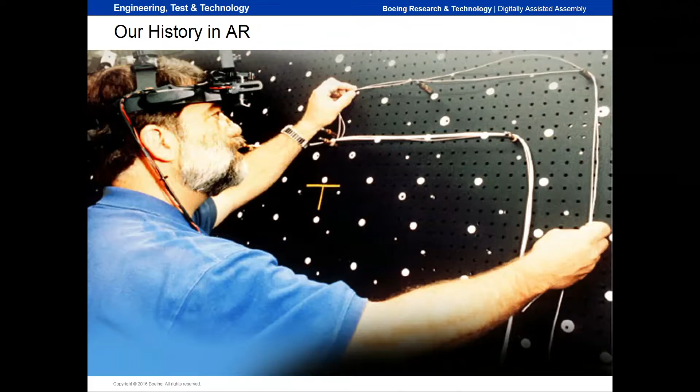We actually have a long history in AR. I've given a few talks at AWE before at other conferences, and I always like to show this picture. It goes back to the late 1980s. These are two of our researchers, Tom Caudell and Dave Mizell, up in the Puget Sound area, in Everett, at the commercial airplane factory. This is one of their prototypes. He's wearing an early version headset, seeing very basic 2D line instructions on how to build up a wire harness. So we've been doing this kind of work for a long time. Obviously the technology was not ready—this was way before its time.

But we've been thinking about these things for quite a long time. Now, of course, technology is far more mature and much more available, so we're doing a continuation of what was started over 30 years ago.

I always like to start with a few definitions, especially since in the Boeing community we're trying to standardize or come to some agreement about what different devices make sense for different applications, different workflows, and what we call different types of technologies. So the technical community at Boeing has honed in on these four kind of baseline standardized terms. I know this doesn't agree maybe 100% with everybody, but at least it's what we're trying to come to a conclusion on.

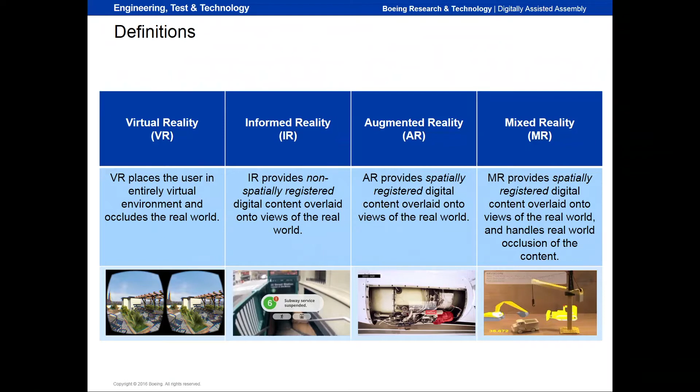Everyone's familiar with virtual reality, where everything is virtually generated. We call informed reality things like Google Glass or a Vuzix display that is kind of often in your peripheral vision, probably not spatially registered, but is taking some content and showing it to you on a wearable. Augmented reality, everyone is familiar with what that means, and we call mixed reality basically augmented reality that handles occlusions in real time, so real objects can occlude virtual objects. Now, the BARK tool that we're standardizing really only deals with augmented and mixed reality. We have lots of other work going on around the company using other types of displays, informed reality and virtual reality, but the BARK tool only deals with AR and MR.

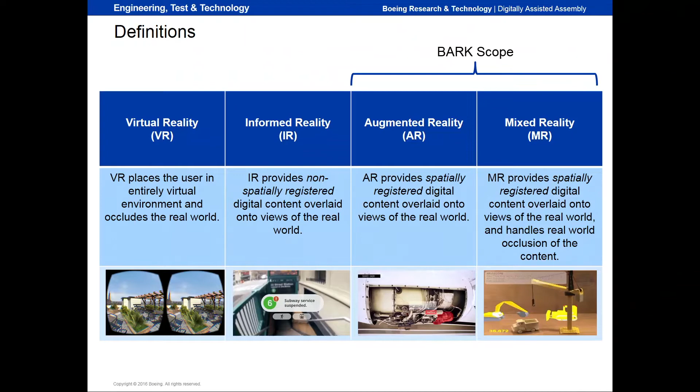So this is the current standard that we are using for augmented reality in manufacturing today, and it's only on tablet computers. I know if you go down to the expo hall tomorrow, you'll probably see a lot more wearables than tablets. But we're still believing that wearables have a little ways to go before we can truly implement them in production in our factories. Now, there are some use cases where it makes sense. However, we're thinking the tablets still have got a lot of mileage in them before wearables get to where we think they need to be.

So tracking a tablet is difficult, so typically what we'll do—our current standard—is to install a tracking system around a work volume. This system here is from Vicon. We also use other manufacturers such as ART and others. So we'll outfit a cell like this. This cell is in El Segundo, just by the Los Angeles airport. We've got 8 tracking cameras there. The cell is about 40 feet by 60 feet, and those tracking cameras give us sub-millimeter accuracy anywhere throughout that work cell.

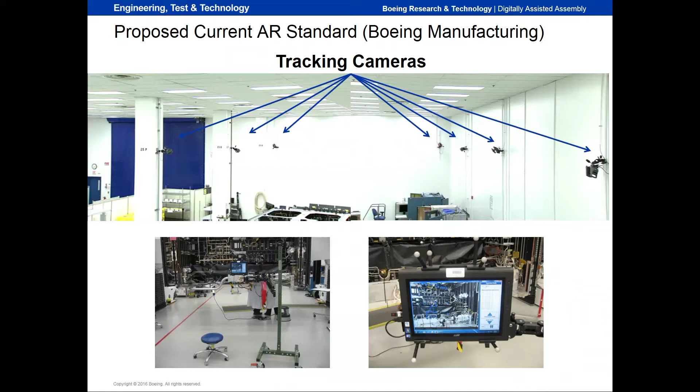We've deployed this tool to over 5 locations now, 5 different programs around the Boeing company, across 4 of our sites across the country, across the enterprise. So these have been mostly pilot work, and we're trying to understand the use cases where it makes sense, where we can get the most value out of it, and get feedback from the mechanics and technicians who are using it so that we can continue to develop it.

It's divided into 3 blocks. For tracking, the BARK tool has really 3 options: either 2 motion capture vendors, for which we've coded interfaces so we can stream in their tracking data, or an old school fiducial marker. Sometimes a marker makes sense - if you're in a cargo hold of an aircraft, or an area where it's difficult to track using any kind of outside-in system, and it's a small volume, sometimes a marker just makes sense.

The core functionality block is really just software. We've put a lot of work into calibrations. We want mechanics to be able to calibrate AR systems quickly and accurately, to make sure that the content, work instructions, whatever they are, aligned correctly. So we put a lot of work into that.

The digital content usually comes from the program itself. It could be CAD models of the design. It could be custom 3D generated work instructions or stay-out zones, whatever the job may be. Content will come from the program. We're developing Unity applications to display that content and register it, and then it will be displayed on a tablet.

Going forward, we have some bigger goals in mind, like most other people. We're currently developing a Unity application that's going to be deployable to multiple platforms. However, we're focusing on these 4, and I've put some of my thoughts here on the benefits, the pluses and minuses of each one. I still believe there is really no one platform that will meet all use cases in manufacturing. Some programs have a higher tolerance for cost, so they can afford high accuracy, big tracking systems because they need the best accuracy. In terms of robustness, different devices are obviously more mature, more robust.

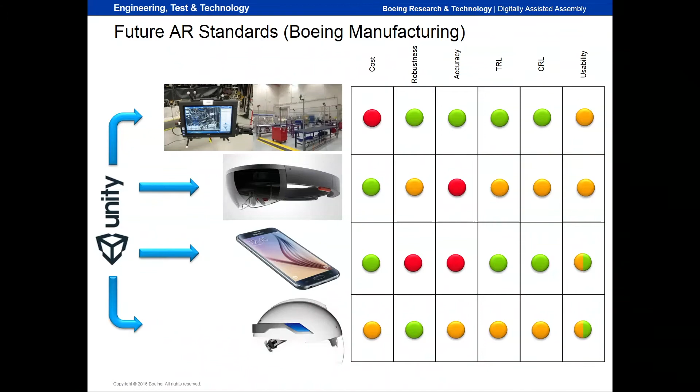So I have a couple of examples of some of the use cases we're working on. One would be, as we've seen a couple of times this morning, step-by-step task guidance, which is pretty straightforward. Everyone kind of begins with this one, I think.

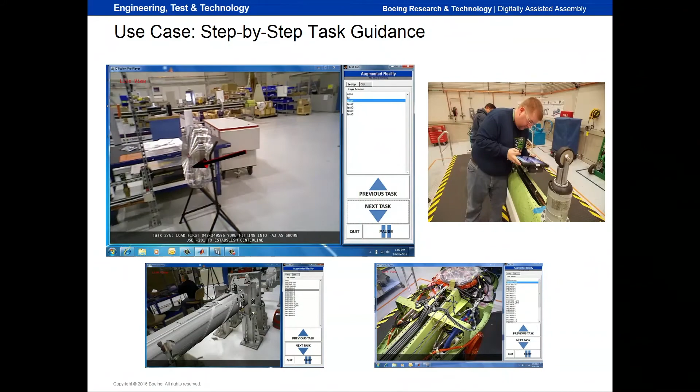That arrow pops up on the screen there if you look away from the instruction. You'd be surprised when you give somebody a tablet how many times they'll kind of look at their feet and say it's not working. You say, well, you have to look over here. So we put that arrow there to help with that.

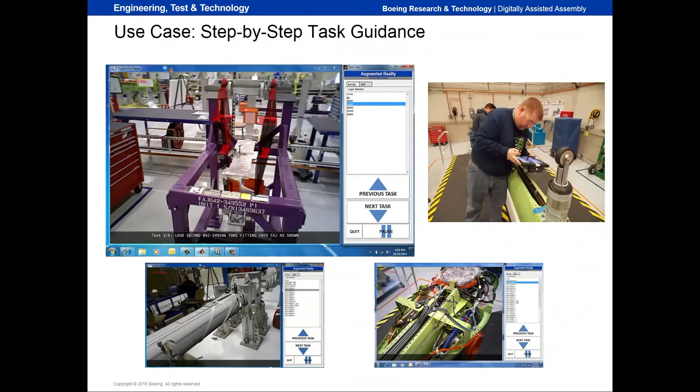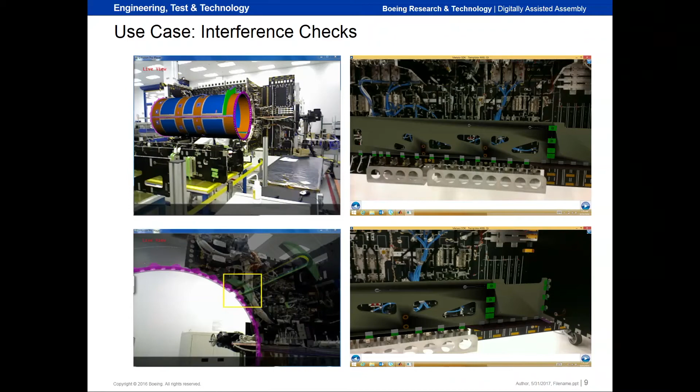If you look at the bottom left-hand image, you can see one wire bundle has been routed incorrectly. If you look at the CAD for that, it actually shows a radius for that bundle to clear that green piece of structure, but it wasn't built that way. So we were able to detect that ahead of time. Usually, without our tool, they would have detected this at the time of mate, which is not when you want to find these things. We were able to show them ahead of time, and they fixed it before they tried to mate it.

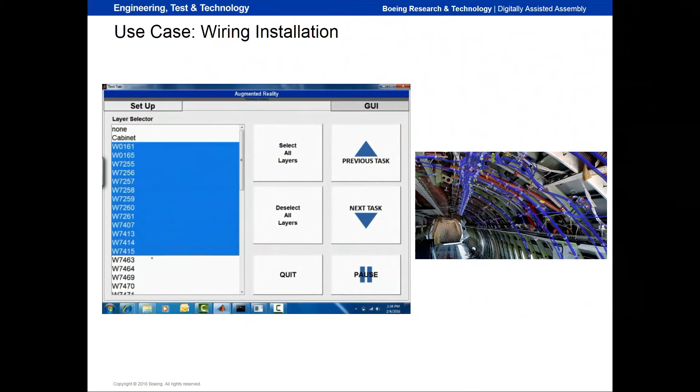So we've seen some good value out of doing things like this. A big one at the moment for us is wiring install. New modern commercial airliners are insanely complicated with a lot of wiring. Some of the programs we're working on, the military platforms, have more wiring than we've ever put into an airplane before. So routing those wires, getting the harnesses in place, meeting separation requirements, things like that, become a real issue. So we're doing a couple things.

The one on the left is a pilot we did last year. Actually, it was on an avionics cabinet. You can see it's showing all the wires. Usually we'd see them one by one. It's showing connector locations, P-clamps, tie-down points, things like that.

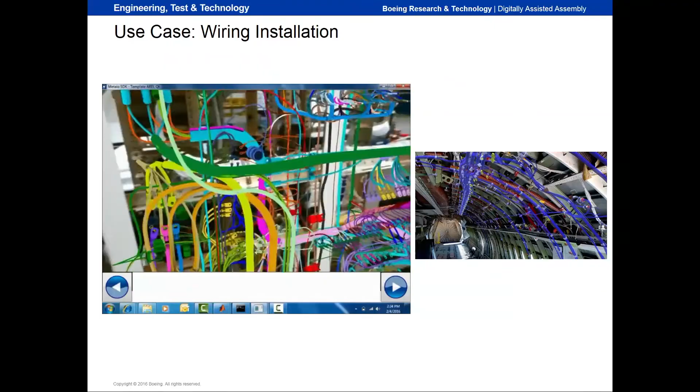The image on the right is more recent. This is something we're working on for one of our larger airframe platforms. We're going to be taking production data that already exists in 3D, and right now that data is viewed on paper, which is unfortunate. We're going to take that data and provide it to the electricians in real time on a wearable on the airplane. We're going to have that by the end of the year.

Finally, the last use case we're really focusing on is training, and this example is using a HoloLens. It's in the Everett factory. You can see here we've crafted a 49-step training episode around how to install this one part. It's called a door sill. It goes over the two sections of a fuselage, goes over the join.

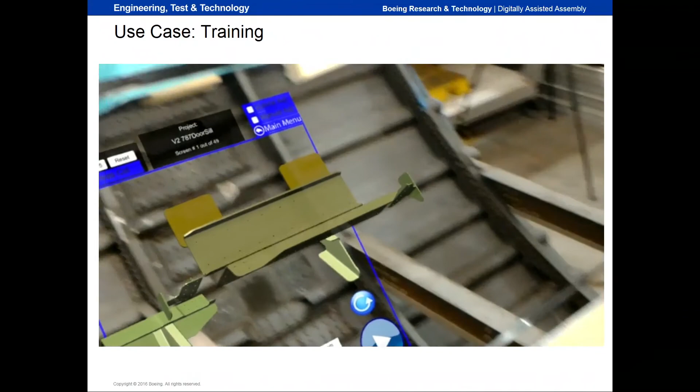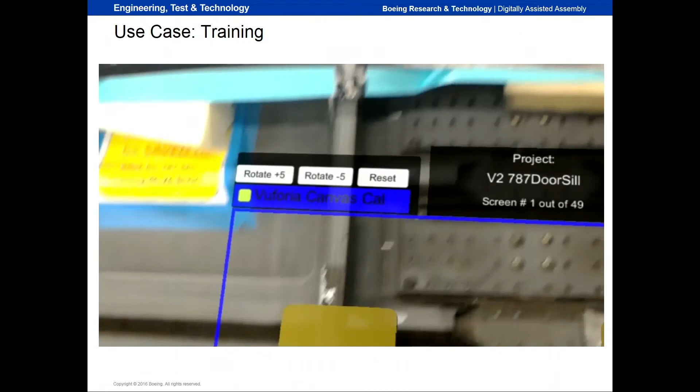It's been particularly troublesome on some of our programs, and we've needed to get more people up to speed on how to do that job faster. So we've crafted this tool. We've been able to cut down the amount of time it takes to train somebody by around 4 times using this tool. They'll put the HoloLens on, spend a couple of hours, and run through these 49 steps.

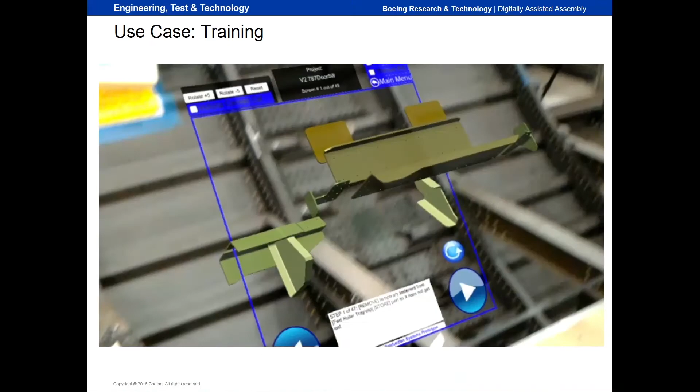We've modeled tooling. It shows where drills go, shows where feeler gauges go. So really, it's just a matter of see and copy. It's very straightforward to do.